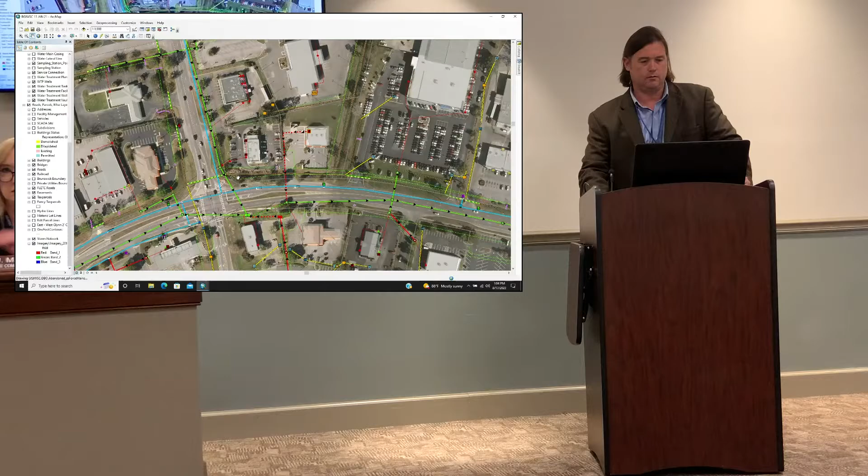Certainly. So, Commissioners, this is the Pump Station 4044 relocation project. Pump Station 4044 is just a little south of the mall area and serves that greater mall area, including as far north as Chapel Crossing, where there are two new apartment and townhome developments currently under construction. 4044 will serve those developments, and it goes as far west as behind Home Depot. So it's a fairly large area. Currently it's a very short force main.

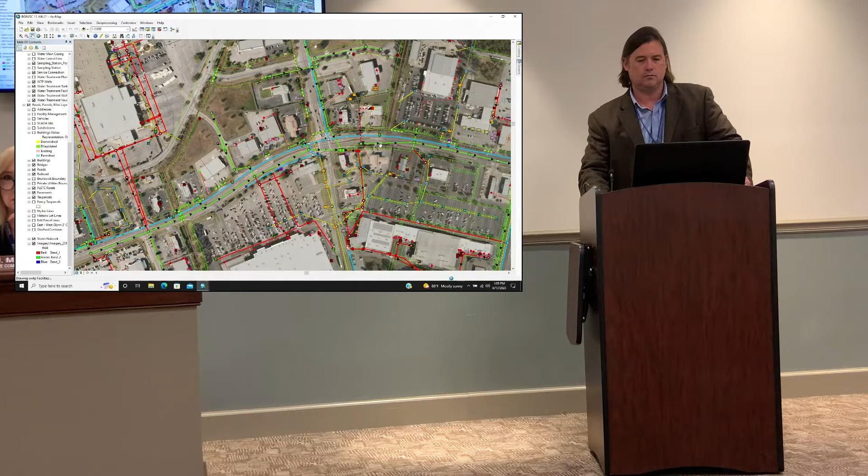Let me zoom back in and turn off the ortho image to make it a little faster. So this is the former Payless, now Brakes for Less, and Pump Station 4044 existing, with the short force main that discharges to this manhole out in Altama Connector right-of-way right now. What we're going to do is relocate the station itself. The structure that's there now for the wet well is going to be converted to essentially a manhole. We're going to rehab that, get it structurally sound, and gravity flow it to this new parcel that's going to be wholly on the Prime South Bank parcel.

This little station here that you see, 4044B, the red in the alpha code there, just denotes that's a private station within the R4044 basin. That station serves a portion of the commercial development back in here, Shane's Rib Shack, and that corner of the commercial development, Publix, et cetera, all drain down towards here. It is a grinder station, and currently that grinder station is in pretty poor shape.

Key in working with Prime South and obtaining this parcel, in the negotiations we worked with the property manager for these commercial entities, who was very excited to learn there's a possibility we can take their grinder station, eliminate it, and gravity flow it directly into this new pump station. That's what we're going to do, that's what we're designing to do. So it helps out that commercial entity with this 4044 relocation.

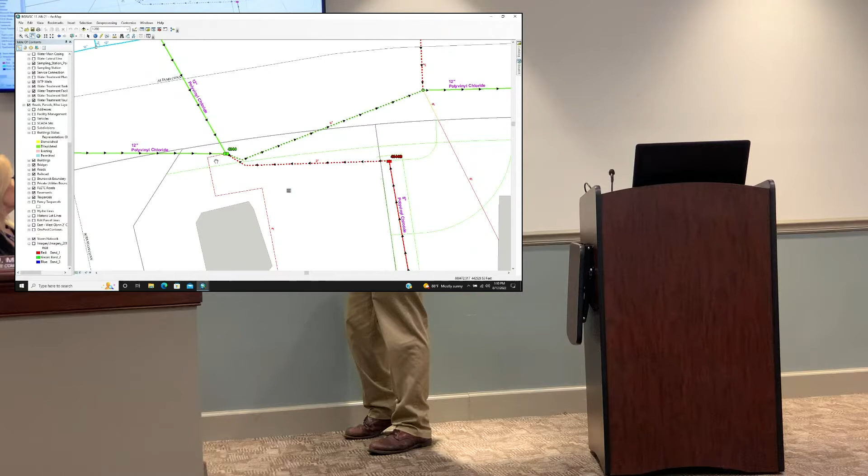Now, I do want to point out this station is being upgraded with the ability to cover foreseeable growth in the area. We do have a limiting factor here of this 12-inch receiving gravity - right now it's not in the works, not funded, to upsize that receiving gravity. But we're maximizing the flow that we can push out of this station to take care of all the developments happening right now and into the near future.

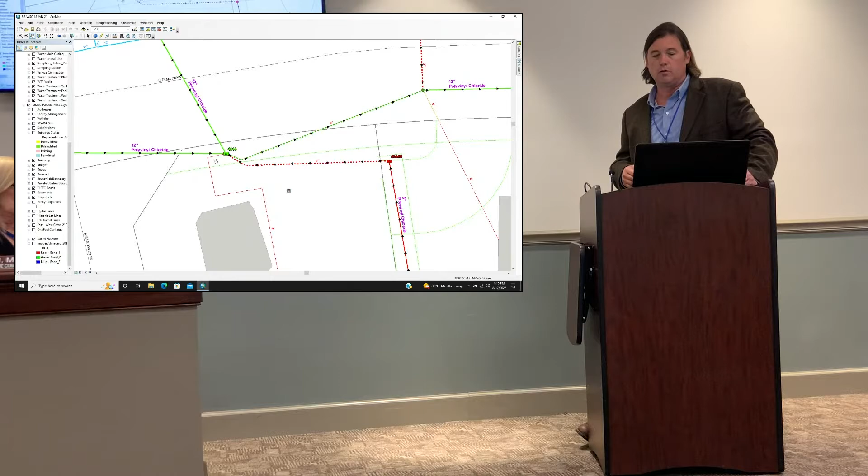But at some point, if growth continues and the station continues to receive more and more flow, we'll likely have to extend the force main all the way out to the Altama corridor to a larger receiving gravity, which is the 18-inch out there. But that's down the road - right now, this gets us to where we need to be.

Can I ask about the private grinder station now - we have nothing to do with the maintenance on that or anything? We do not currently, no sir. Okay, but that's gonna be eliminated and the flow will just come right into this pump station. That is correct.

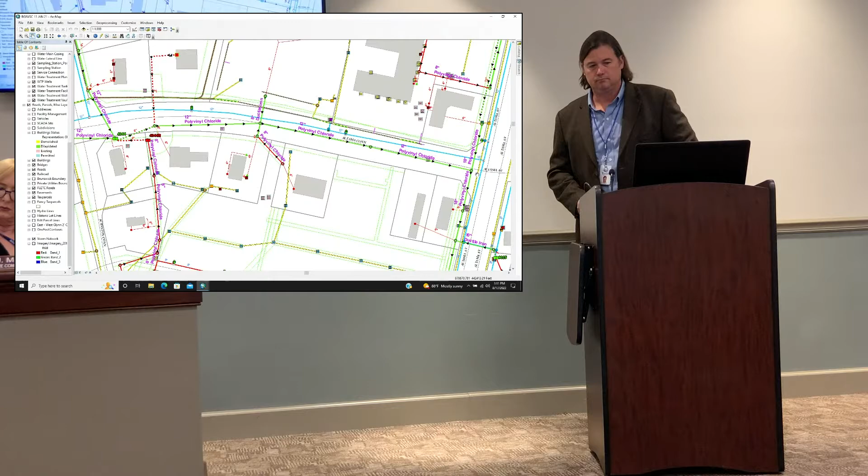Any other questions? Hearing none, all in favor? Motion carries 3-0. Thank you.

Next item is the Glynn County Animal Control Facility Lease, IGA Amendment Number 1. Before you is an amendment to the intergovernmental lease agreement for the former animal control facility. As you recall, a couple of months ago we entered into this intergovernmental lease agreement for that facility. The county then approached us and asked if we would be willing to modify that agreement to allow them to occupy the building. Currently, we are only occupying the grounds as a lay-down lot, essentially storage. So this amendment will allow the county access to the facility and change our lease essentially to a grounds lease. I believe their intention is to use this for training purposes for the police department, the building itself.

So that's the only modification, they have access to the building. When it was brought for us, hopefully nothing happens, but if we're leasing it and somebody gets injured during training, let's make sure all the legal documents are where they need to be in that scenario.

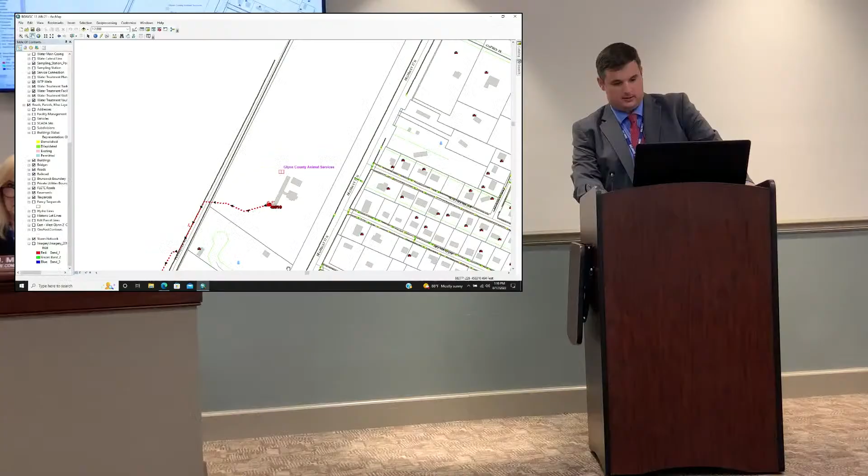So this is the Glynn County Animal Control Facility here. Does that show the property line? Can you zoom in on that? There's the property line, keep that in mind. The gray line here marks the property lines, and it comes all the way out to 17, with road frontage on 17. And then there's the main entrance here, which goes across the GDOT right of way. So they've got a lot of land outside the building area that's just in woods right now. Right, that's correct. And so we could actually occupy all that too if we wanted. Theoretically, yes sir.

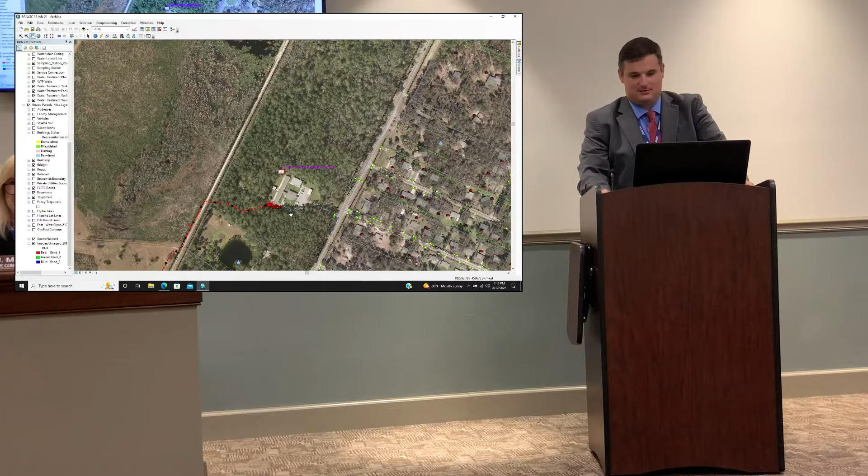I think we probably want to check with them before we start knocking any of their trees down. There's lots, so let's zoom in on that so we see where they're gonna be using for training and where we're using for storage, because I thought we were gonna use some of that for storage inside too.

We were discussing that. The contractor decided he would rather use it for Connex boxes to sit there as wholesale storage, and then move it to the location he was previously working at. But that's that contractor, we've got other contractors coming. Most of the other contractors, I don't think will actually need an office space to work here while they're here.

Wasn't the county doing some rehab inside the building also after, at one point they were? I don't know if they've finished that or not. Does our lease have a stop date? Does our lease have a start and stop date on it? It's already started. I know it started, but does it have a stop date, a termination date?

Usually we have them renewable, 2 years with a termination clause. Okay. And we're 6 months into it? Yes, sir.

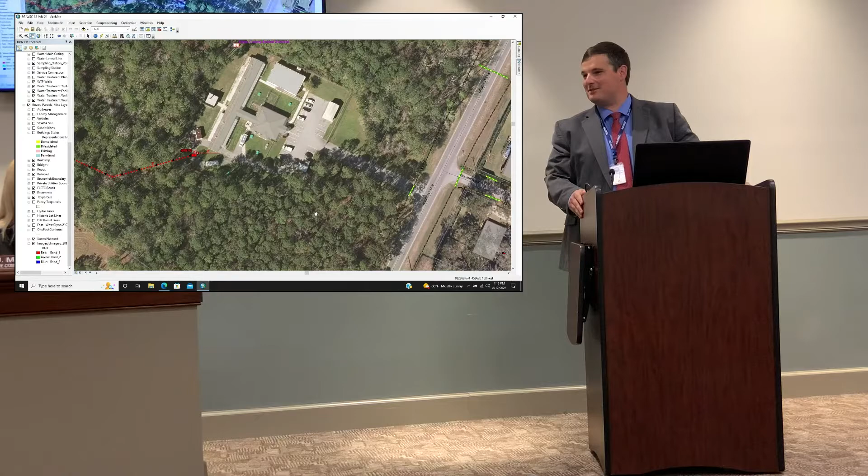Andrew, you don't see any problems with this? I didn't see any problems with them doing the training anyway, other than some liability protection, so I just wanted to be sure in case somebody got hurt out there. Training typically comes with some accidents occurring, because people are getting trained on how to do things, and I didn't want us to be on the hook for whatever happened out there if that occurred. But certainly want to support Glynn County PD and their activities. And there's easy access to the building, since it's right on 17.

Okay, we have a motion and a second. Any other questions? Hearing none, all in favor? Motion carries 3-0. Thank you.

Do you think that space is big enough if we need a backup plan for something else down the road?

Next item is infrastructure and easement dedications. Mr. Klein?

All right, while they're working to get that pulled up over there, we've got 2 infrastructure and easement dedications. The first one is at the Lanes and Games Bowling Alley up off of 341. They had to actually bore underneath 341 there in the GDOT right-of-way, so this is the dedication of the water infrastructure in the public right-of-way.

As some of you may know, anytime we have a private developer that connects to our system in the public right-of-way, we are actually the permit holder for their work in the public right-of-way. GDOT requires us to be the permit holder on that. So we make sure this is obviously done to standards, because we're the ones that are ultimately on the hook for it, and they've completed the record drawings and dedication documents for that water infrastructure.

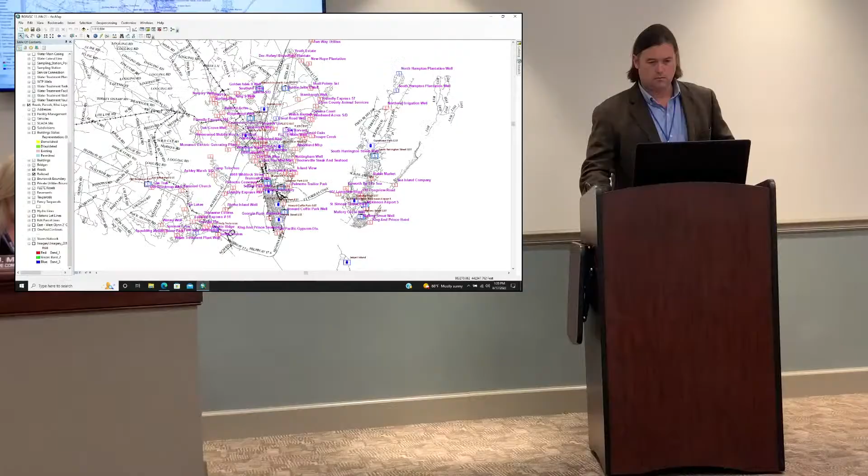Would that be accurate, Mr. Klein? Yes, sir. As Mr. Burrows was saying, I would classify these as pretty routine and normal day-to-day business we do around here with working with private development. And, as he said, this first one is...

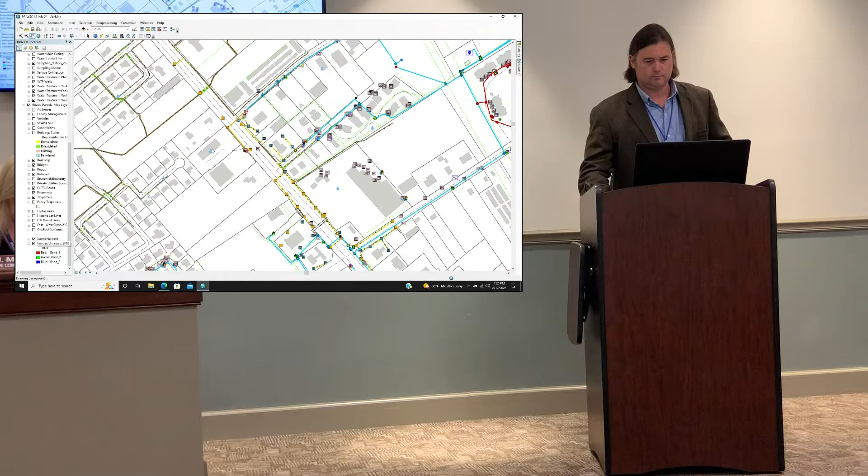Yeah, so we can see exactly what this is. 437 feet of pipe, right? Yes, sir.

So, as Mr. Burrows said, we brought this across, or the developer brought this across the 341 right-of-way, New Jesup Highway, an 8-inch water main. They needed fire protection to get to their new business. So to do that, they brought the 8-inch across, cased, all per DOT and joint water standards. Once they got to the other side, or their side, of 341, teed it off for future expansion to the north, and then they ran it to the south as a 12-inch.

Now, they only needed an 8-inch for their needs. We do our best to work with our applicants so we can have mutual benefit. In this case, they agreed to run a 12-inch main instead of the 8 they needed, and we supplied the valves in this case. So it was a good win-win for all parties.

We were able to upsize the 8 to a 12 for future extension up and down 341, and the applicant was able to get the fire protection they needed. And they now have a fire hydrant right there at their doorstep and potable water as well.

Did we participate in any of that cost? We gave them the valves on the 12. We paid for the 12-inch valves. Okay, but that's it? That was it. They paid for the pipe. Yes, sir. Sometimes we work out these arrangements—sometimes we provide pipe, sometimes we pay for valves—to try to balance the cost for the developer.

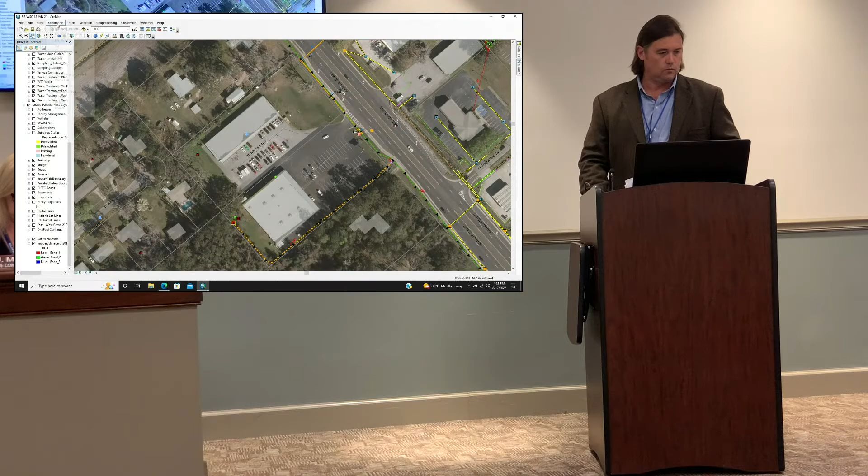Next is an easement dedication on Hawkins Island, which is about midway on St. Simons Island.

At the very northern end, the property owner was doing some Glynn County permitted work, and in that process Joint Water had the opportunity to review it. In this case, we saw a chance to clean up an issue: we have a public sewer main, a gravity sewer main, that we own and maintain, but did not have an easement over. This easement cleans that up for us.

The infrastructure was already existing, so there's no new infrastructure involved. It's simply an easement over the existing infrastructure. And those are the two items.

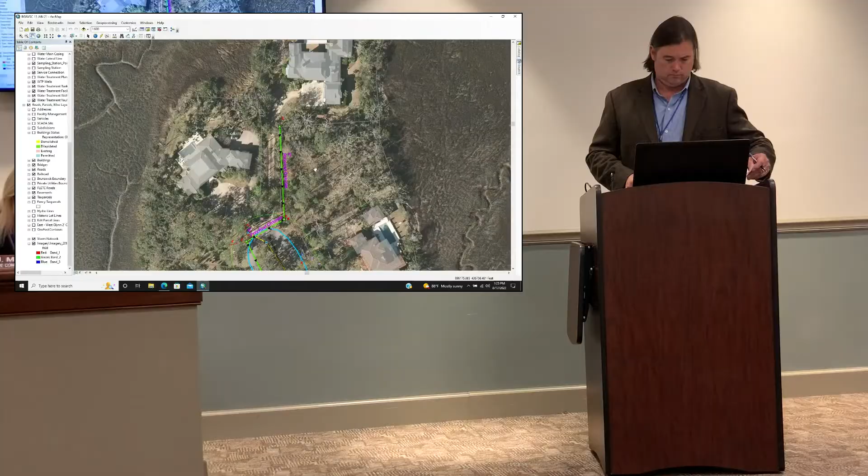Do I have a motion? I'll move that the Facilities Committee forward these projects with associated dedications and easement to the full commission for approval and acceptance. Second. Motion seconded. Any other questions? Hearing none, all in favor? Motion carries 3-0. Thank you, Commissioners.

Next item is equipment purchase, FEMA funded generators. Back in July of 2020, we were awarded a hazard mitigation grant from FEMA in order to purchase 8 fixed generators, 5 of which will be located at water facilities and 3 at Academy Creek. The approved total cost for the project is $1.35 million.

As you know, we pay approximately 15 to 20% of that, so our local share would be $203,660. The agreement for this was executed and approved in November of 2020. You see the listing there.

Again, these are replacing the 5 water production facility generators impacted during Hurricane Irma. The 3 generators at Academy Creek will replace the current 2, adding a 3rd generator. Currently, not all the buildings and processes at Academy Creek are on generator, so adding a 3rd generator will allow us to do that.

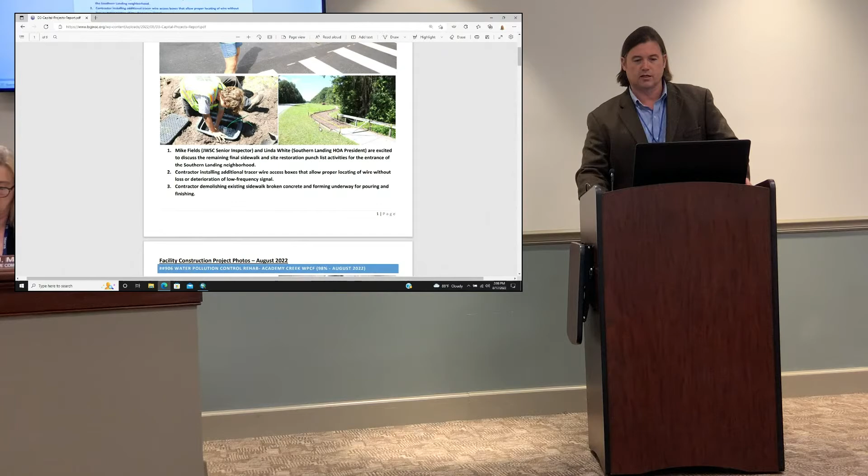Bottom right is some of the sidewalk being replaced. For the Academy Creek plant, Mr. Burrows covered a couple high points of that, but I'll let him cover the pictures.

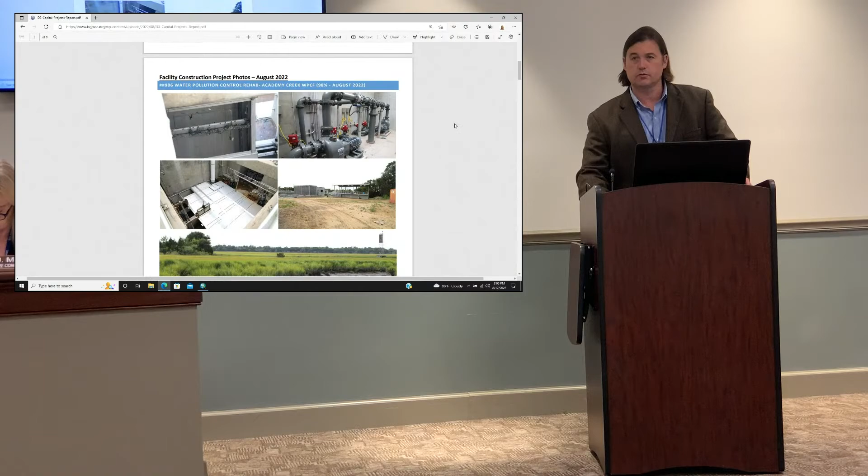Sure, top left there is the actual bar screens, so you can see the low level of material that's still being pulled out there. Those screens are really being quite effective. As discussed during the change order, some of the electronics are not working, but the screens themselves are doing a great job. Staff's very excited about the function we have there. Still a lot of rags in the system that they're working through, but hopefully not getting much, if any, rags through the new screens as they're going through.

On the right, that's the pumps for the filter backwash. We talked about that sump pump panel that needed to be added. Essentially, in case one of those pipes bursts or one of those pumps fails and there's water going everywhere, there'll be a sump pump down there tied to an alarm, that audible alarm, so that pit doesn't fill up with water. They'll be bigger than this, but those are actually Gorman-Rupp pumps similar to what we'll be installing out at Pump Station 4110.

Those are the odor control covers on the left, and you see not everything is covered. Those are the ones we're actually having to get remanufactured. You can't necessarily see it in this photo, but there are some beams that they did not measure correctly, so where they put their beams, we're going to be in conflict with actually pulling the pumps out without having to completely disassemble the jigsaw puzzle, which we were not pleased with. So they're having to reconfigure the way they're doing that. You can see the intake for the odor control, that white pipe in the very back is actually the intake for the odor control system.

The odor control system is functioning. I have not noticed odors off-site since I've been driving through there, but it will be even more effective once all of that material is actually enclosed. On the right is a shot of the filter structure from far away and some of the regrading. The contractor has hydroseeded that now, trying to get grass to grow, but I think it's just a common thing, contractors just hate trying to grow grass. They say it's the worst part of a job. It's tough watching it, too.

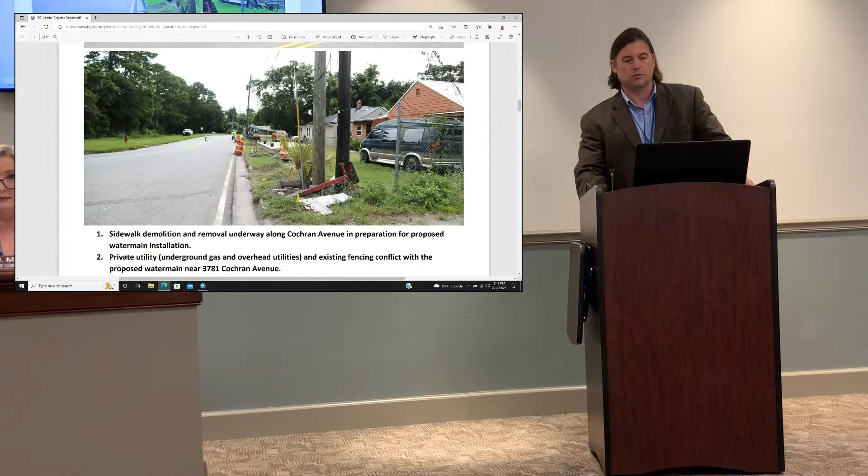If you have a chance, drive down through that area, Cochran Avenue and such. They're really doing some improvements to that neighborhood, dressing up a lot of those homes, and it's looking really good. Our project's going to do nothing but help beautify that area.

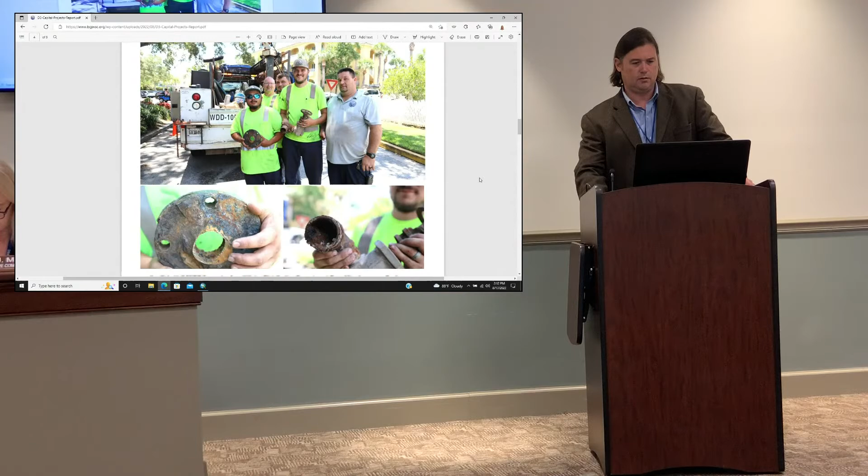Galvanized replacements, it's an ongoing operational project every year. Good shot of the team there, holding up some of the treasures they've dug up, flanges and typical galvanized pipe, the remnants of what's left of them.

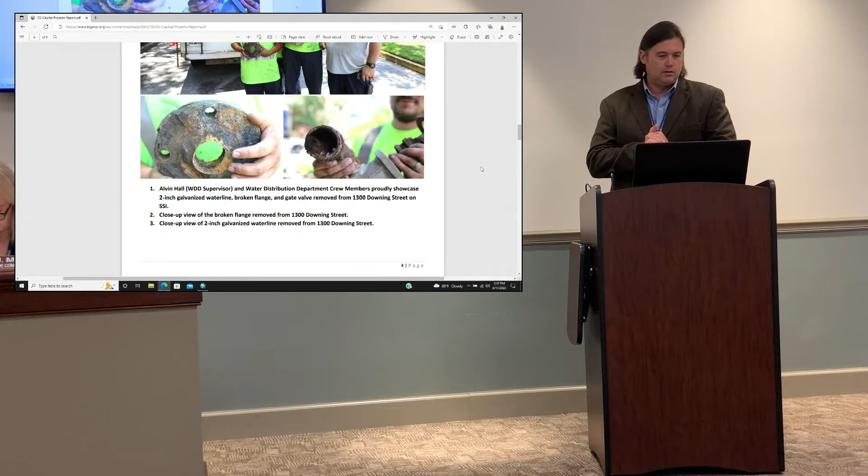Mr. Alvin Hall and his crew members are very proud to bring us samples routinely of what they find out in the field. They get really excited about their work.

Meter replacements, touched on before. Ms. Roberts, anything else you want to add? We've hit the magical halfway point, so we've got over 15,000 meters installed now.

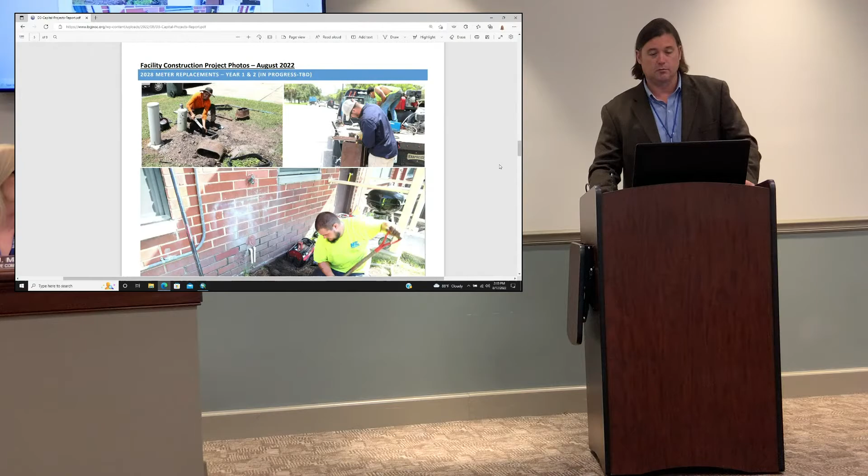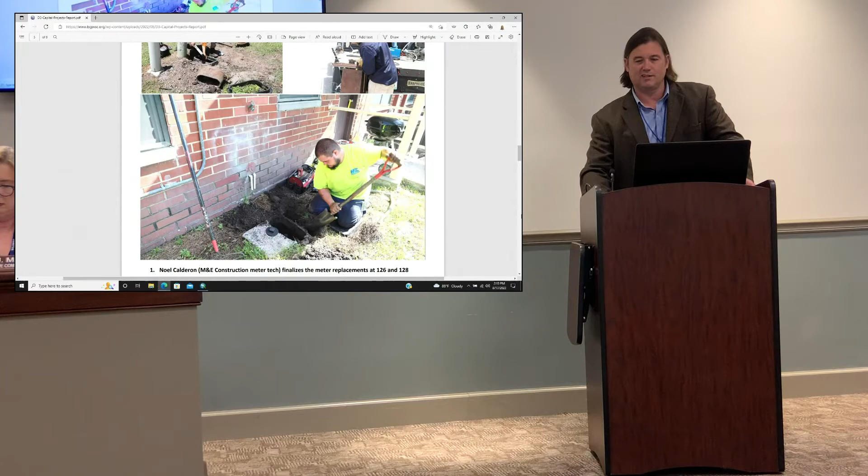They've been doing a lot of work up and down Martin Luther King Boulevard too, and you see these guys out there getting it. In some of the areas they're working, this is a good shot here, right up against people's homes, right next to, in this case, a sewer clean out. Every one is a unique install.

Are we finding meters we didn't know we had, or are we finding some services that did not have meters on them? Yes, we have services that do not have meters. And we're also finding some inconsistencies with the number of dials being recorded versus the number being charged, so there's some revenue recovery happening within our system.

The billing is based on the reading of the meter, but the reading is based on the number of dials, because that determines whether it's a multiplier of 10, 100, 1,000, whatever it may be. So if we have the incorrect number of dials in the system versus what's actually out in the field, then we're either under or over billing. The ones we've found, we've been under billing, so we've recognized some revenue recovery just from that.

How much is that recovery? Is that an input error in our computer system? Yes, sir.

We won't have that issue with our new system, right? No, it still has dials. We got the analog heads on them instead of digital heads, because people are used to seeing them and have more confidence when they go out there, so it'll still have dials and we still have to do that process. What we won't have is the compound meters - before we would have the one low flow reading and the one high flow reading that we had to add together to get the monthly billing. Now it's just one meter, one reading.

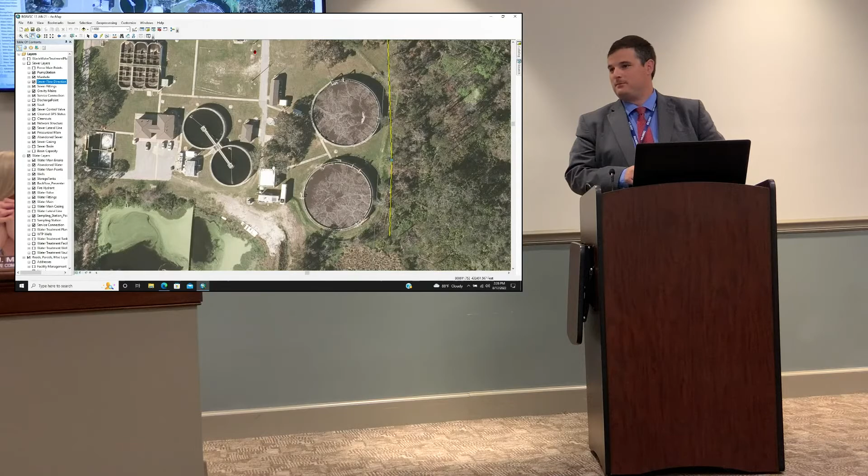Counterpoint to that, if it ever gets low in the middle of the night, it will automatically ramp it up so we don't come in the morning and find out the DO's been low all night. So it's a very effective way of doing things, kind of standard practice now to automate blowers because of how expensive power can be when you're running these big pieces of equipment.

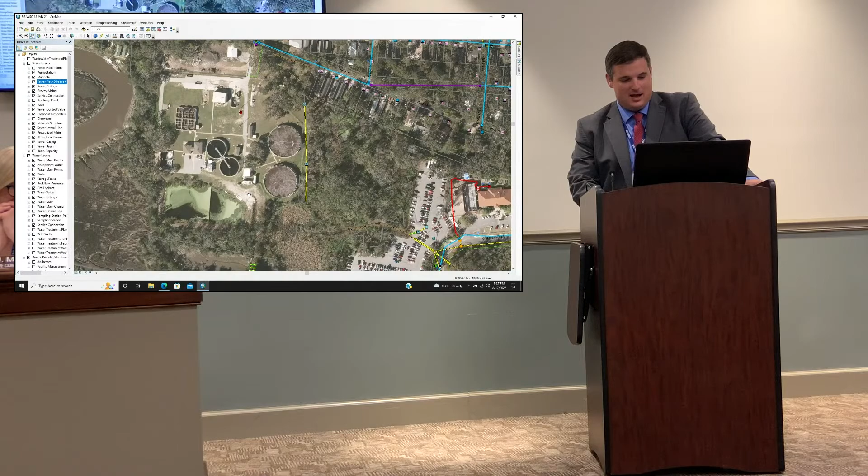So, all in all, a lot of needed improvements there, working with the contractor and design build team on getting updated drawings. One advantage of having a design build contractor on site is when you find a sinkhole in the middle of your plant, you just get them to go at it instead of finding somebody else, because they already have people and equipment on site. That worked out about as well as could be. It's never a good place for a sinkhole, but if we were ever going to have a line collapse, that's probably the best line in the plant that could have collapsed, because we already had another line we could bypass through.

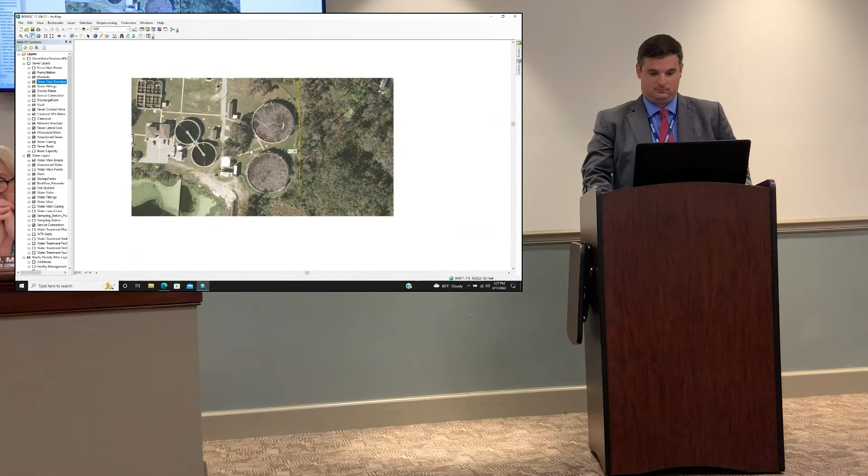Speaking of sinkholes, what's going on over on Frederica, fire station? And Colonial Drive? Question on the fire station, I was told, I haven't been over there. Did they get the repaving done at the fire station last night? I've only been on the outbound lane. They were doing some paving last night, and my understanding was it was supposed to be that first cut on Frederica. I crossed it last night, not sure how late they were doing it, but I heard 2 or 3 a.m., the middle of the night. I wasn't up that late.

What caused it? There were leaks in a manhole that we've since sealed up. We now have the ability, and it's been very effective for us, we bought equipment to actually inject grout instead of having to get contractors in to do it. So we have guys go down and core through the manholes and inject grout to stop leaks. We're also doing it in some of our wet wells. On some of our larger jobs the equipment isn't set up for that, but for these smaller jobs, we're able to inject grout ourselves.

The one up by Colonial, what we believe occurred is, if you remember when they freshly paved Frederica and then a week later we had a water main blowout with the worst timing on the planet, we think the old transite line collapsed and caused a void, which is causing this. We're going to do ground stabilization grouting there as well to try to fill it up. We were waiting on materials to get here, so I think they've done that, maybe last night as well. I know they had crews working overnight, so I'm not sure if they were working on that one or the back construction entrance into Lake Cottages across from Harris Teeter.

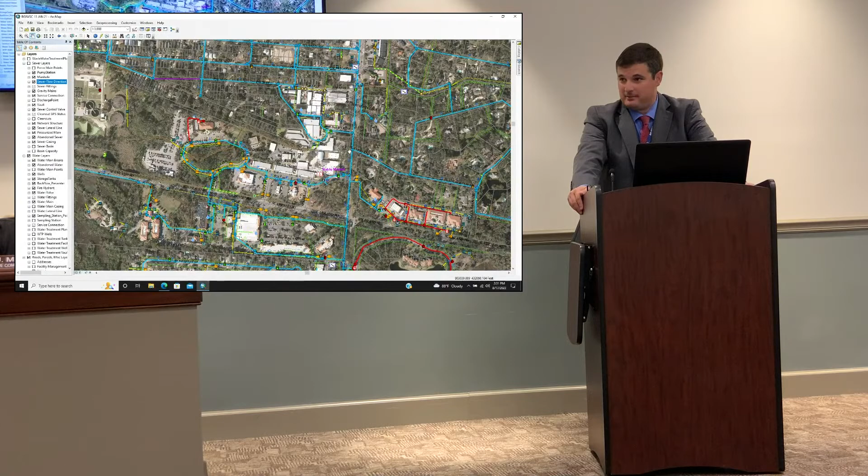Obvious improvements for odor control. We would be hoping to bring to you, once we get further into the project, a budget request for a project to actually install HDPE manholes at that intersection like we did at the East Beach and Demere roundabout. Currently, those manholes fall about 12 to 15 feet from where the force main discharges come in. There's one on the Sea Island side and one in the acceleration lane on Sea Island Road. The force main from pump station 2003 in Oglethorpe Park actually pumps to that and discharges into the top of that manhole and falls 15 to 17 feet.

And the Sea Island discharge does the same. So what we are going to recommend with these HDPE manholes is to actually make the connections on the bottom so it doesn't fall. It upwells in the bottom and the gases don't have a chance to strip out as it's interacting with the air. We'll do a drop pipe outside of that, dropping into the bottom.

The most basic example I always tell people is kind of like pouring Coca-Cola in a glass, all those carbonation bubbles come out. Well, the same thing happens when you drop sewer 15 feet, and that's what's coming out. So those will be gasketed HDPE covers so nothing will get out, and it'll come in the bottom.

One thing we're considering, which is in my opinion a fantastic idea by Mr. Klein, we're going to have to relocate some assets in there because of just the shape of the roundabout. Mr. Klein very intelligently suggested we go ahead and put those things in casings at this time while they're in there doing it, so we never have to dig in that intersection again. If something happens, we snatch it out of the casing and put a new pipe in.

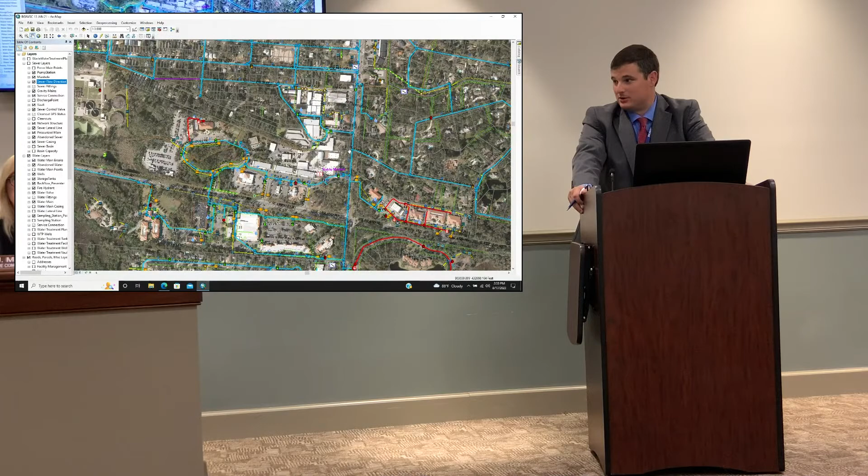Let's move to the spreadsheets and the Gantt chart. I got it.

The North Mainland Water Loops project, if you remember, that's to connect 3 areas in the North Mainland where it's single fed and large areas have to be shut off in the event of a main break. That project, we are hopeful will be out for bid by the end of September because we have applied for Army Corps of Engineers nationwide permitting, and the engineer believes we'll have that theoretically by the end of August. So we'll be able to put that out for bid in the very near future.

Community Road, working with the redesign due to low pressure in that area. They've submitted the updated PER at 30%, and they're not going to do a 60% set. They're going to go from 30% all the way to 90% on this. They had to get a little more survey done in the 30% phase. And the pump station...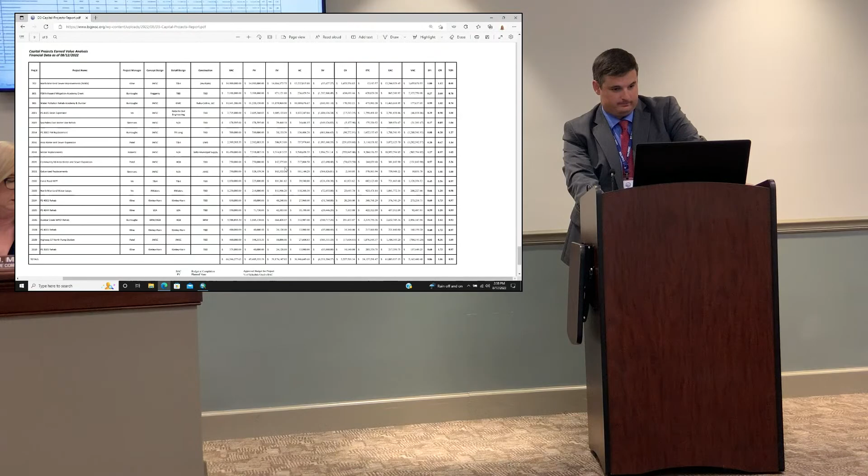Any questions? None. I want to ask Ms. Roberts to introduce our new employee, please.

Thank you, Mr. Chairman, it would be my pleasure. As you know, we have been in the search for a new Director of Finance for quite some time now. We've searched across the country, and guess what — we found one in our own backyard. I'd like to welcome Mr. David M. Owens, CPA, to the staff. You'll be seeing his face in the Finance Committee meetings and the Commission meetings upcoming. Just wanted him to see the operation of the Facilities Committee today and get a general lay of the land. So, Mr. Owens, welcome — we're extremely happy to have you.

Thank you, good to be here. Yeah, welcome, welcome to the team. When he showed up last week, I told him, you know the audit's due at the end of the month, right? So he showed up at a great time to get everything figured out in one solid month.

Absolutely. And just to note, before the Finance Committee, there's been a bit of a transition. As you may be aware, Ms. Frances Wilson was out for almost 8 weeks with some personal issues, but she has returned to the office now. Her return almost coincided with Mr. Owens' arrival, so the two of them have been working very closely together, and he's been a great help already in helping her gather some of the things for the audit that she needs. So he's already getting his feet wet.